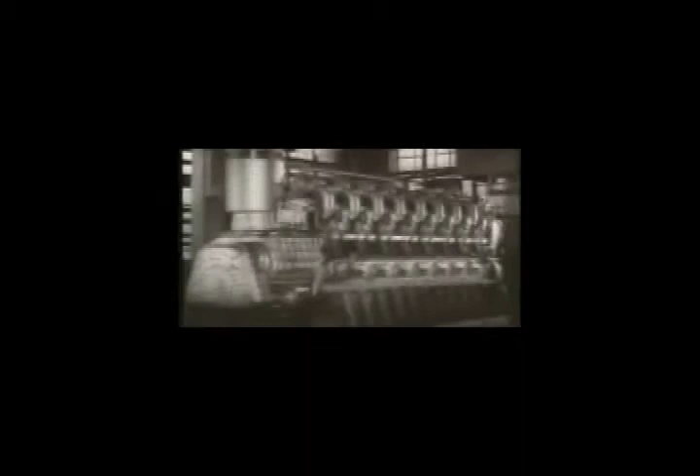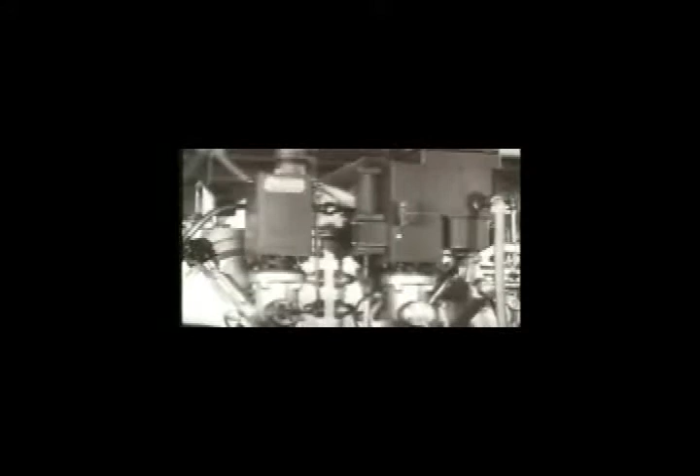If a diesel engine is to be operated within a certain speed range and under varying loads, a mechanical device is required to control the amount of fuel injected. This device is called a governor.

The speed of a diesel engine depends on two factors: the amount of fuel injected into the cylinders and the load under which the engine works.

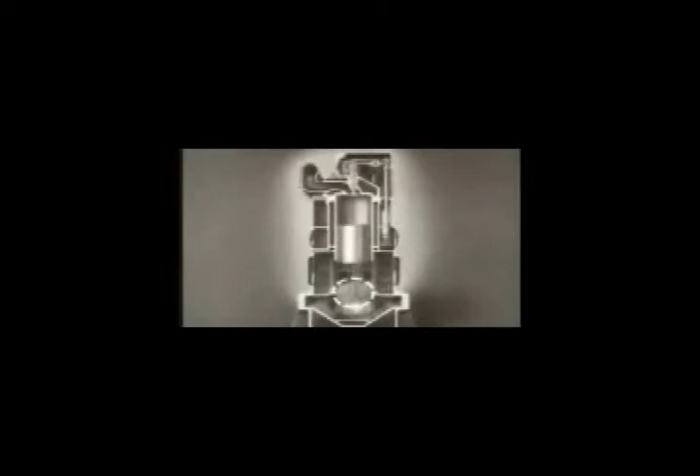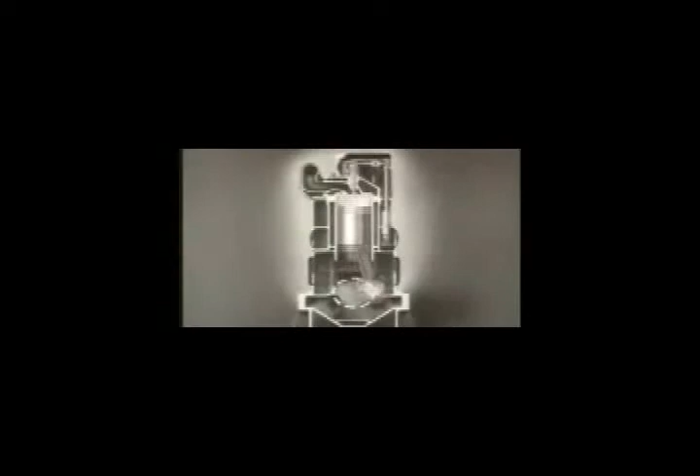Suppose the engine is running at a certain speed. If the load is increased, the engine slows down. If the load should decrease with no change in the amount of fuel injected, the engine speeds up. By regulating the amount of fuel injected, the engine speed may be kept within a certain range. To do this, various types of governors have been developed.

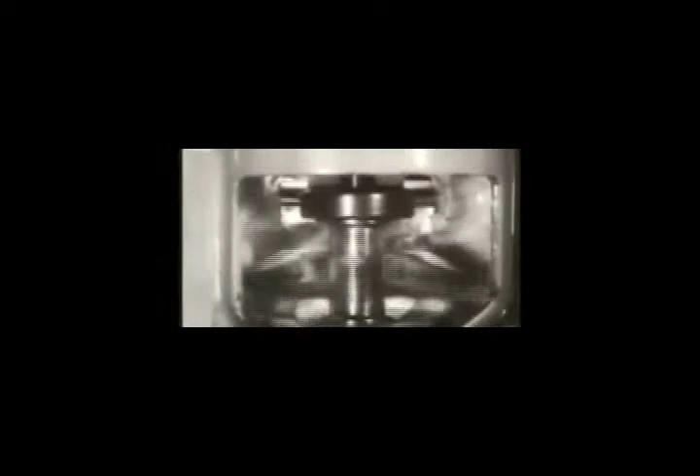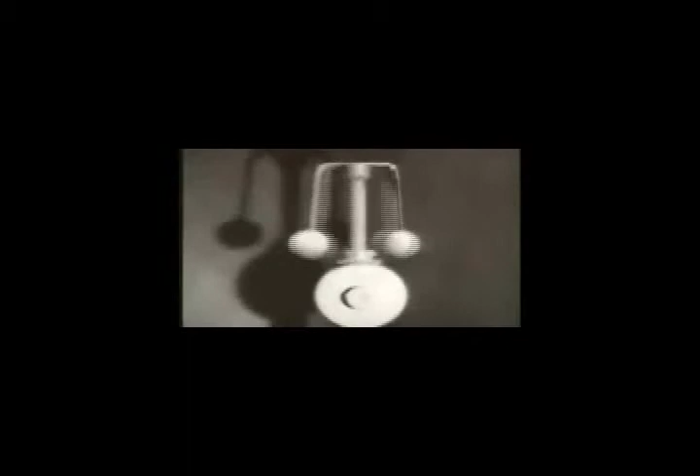Most governors operate on the principle of centrifugal force. Centrifugal force is the tendency of an object, when traveling in a circular path, to move away from its axis of rotation. These rotating weights are affected by this force. As the speed is increased, centrifugal force grows stronger, pushing the weights further away from their rotational axis. The distance from this axis is proportional to the speed of rotation.

The regulating governor not only keeps the engine from overspeeding, but maintains the engine's speed at a fixed rate despite changes in load.

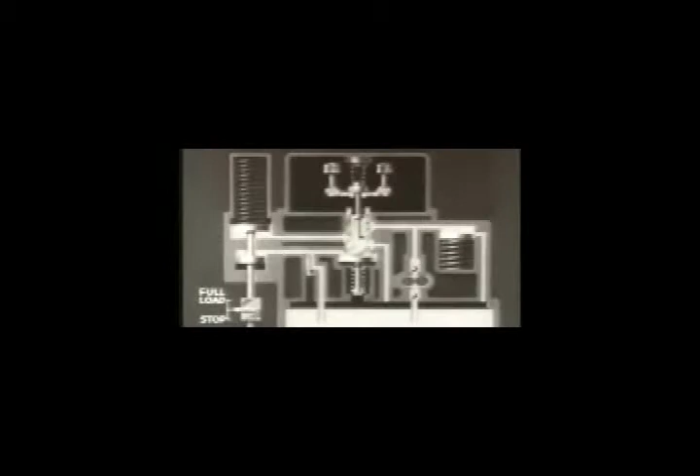In this governor, the flyweights are linked hydraulically to the fuel control assembly. This assembly consists basically of a piston connected to the fuel system controls, a housing, and a spring. The downward pressure of the spring is balanced by oil pressure on the lower side of the piston. The amount of oil in this space is regulated by a valve called the pilot valve, controlled by the flyweights.

When the engine is running at a set speed, the port to the power cylinder is covered by the pilot valve plunger. The plunger is held in this position by the flyweights.

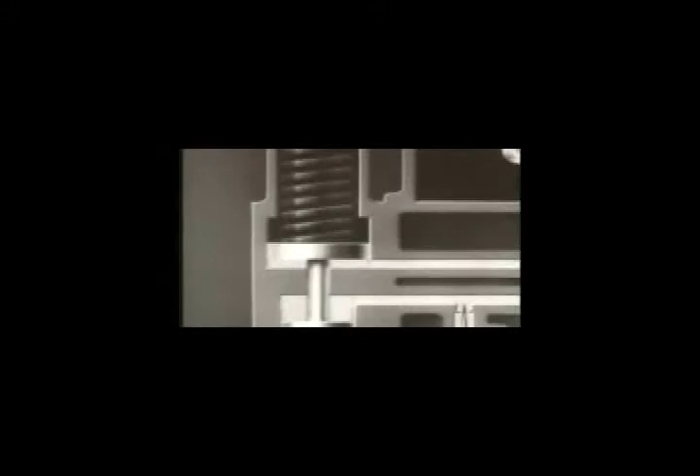If the engine load decreases, the engine speeds up, and the additional centrifugal force throws the flyweights outward, raising the pilot valve plunger. This opens the port, and oil from the power cylinder is now allowed to flow through the pilot valve cylinder into a drainage passage to the oil sump. The power spring forces the piston down, actuating the linkage to the fuel system controls, and the supply of fuel to the engine cylinders is diminished.

As the engine speed returns to the set rate, the flyweights resume their original position, and the pilot valve plunger again covers the port.

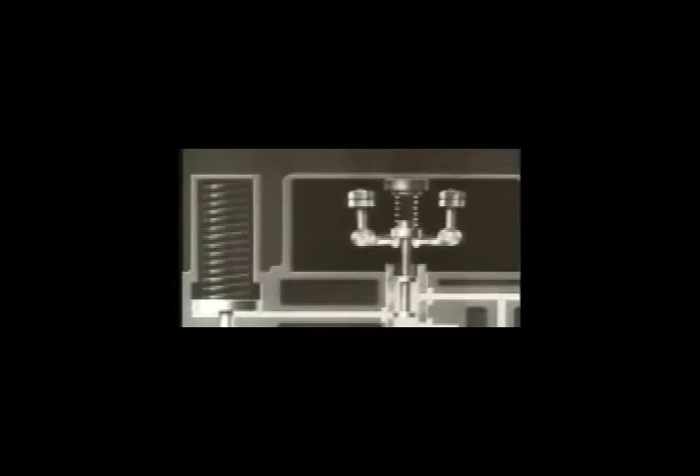If the load increases, the engine slows down, and the flyweights move inward. This lowers the pilot valve plunger, allowing oil to flow through the pilot valve chamber to the power cylinder. This oil, supplied by a pump, is under a pressure sufficiently high to overcome the pressure of the power spring. The power piston moves upward, increasing the amount of fuel injected into the cylinders. Once again, as the speed returns to the set rate, the flyweights resume their central position.

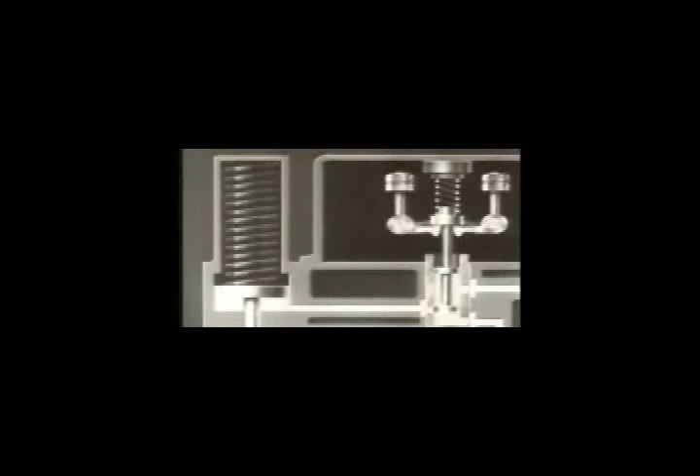The gear pump, which supplies the high-pressure oil, is driven from the governor drive shaft and takes suction from the governor oil sump. A spring-loaded accumulator maintains a constant head of oil and allows excess oil to return to the sump.

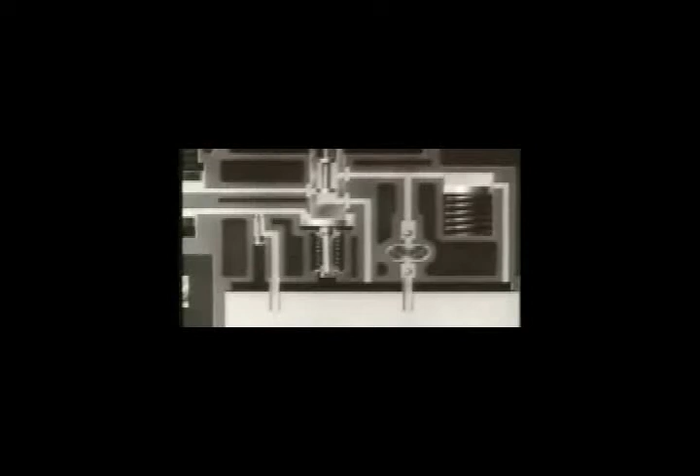To increase the regulating governor's sensitivity and to prevent overcorrection, a compensating mechanism is used. This allows the pilot valve port to remain open just long enough for the engine speed to return to the set rate. A compensating plunger on the power piston shaft moves in a cylinder which is also filled with oil.

When the engine speed increases and the power piston moves downward, the compensating plunger is also carried down, drawing oil from a cylinder below the pilot valve bushing. This creates a suction above the receiving compensating plunger, which is part of the bushing. The bushing moves upward, closing the port to the power piston. Thus, the power piston is stopped, allowing no time for overcorrection.

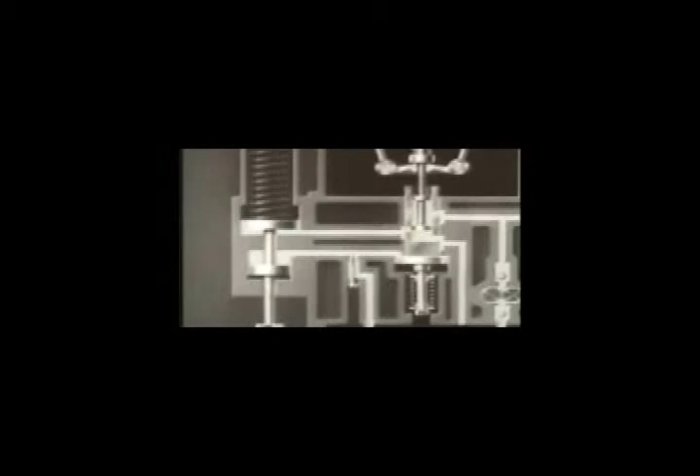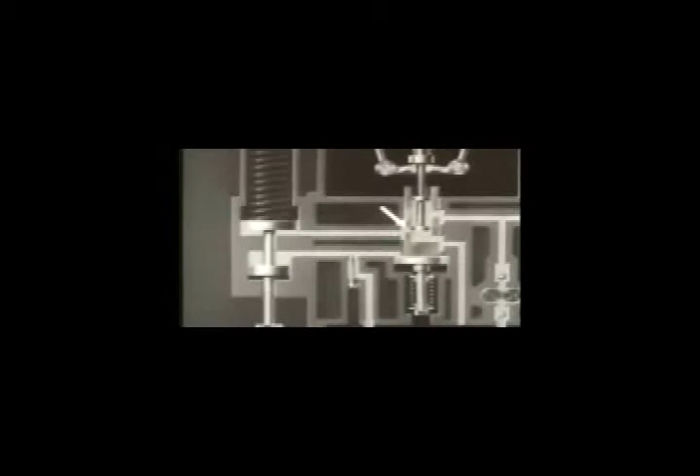As the flyweights and pilot valve return to their central position, oil flowing through a needle valve allows the compensating spring to return the pilot valve bushing to its central position. To keep the port closed, the bushing and plunger must descend at exactly the same speed. Therefore, the needle valve must be adjusted so that the oil passes through at the required rate for the particular engine.

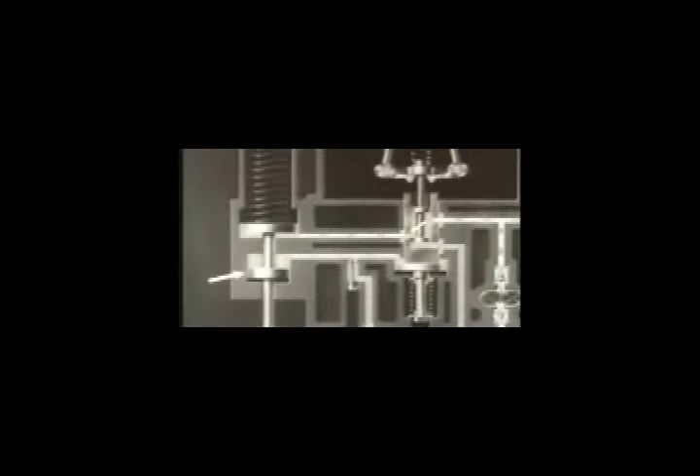When the engine speed drops below the set rate, the actuating compensating plunger moves upward with the power piston. This increases the oil pressure above the receiving compensating plunger, which therefore moves down, carrying with it the pilot valve bushing. As before, the port leading to the power cylinder is closed. The excess oil in the compensating system now drains out through the needle valve as the spring returns the bushing to its central position.

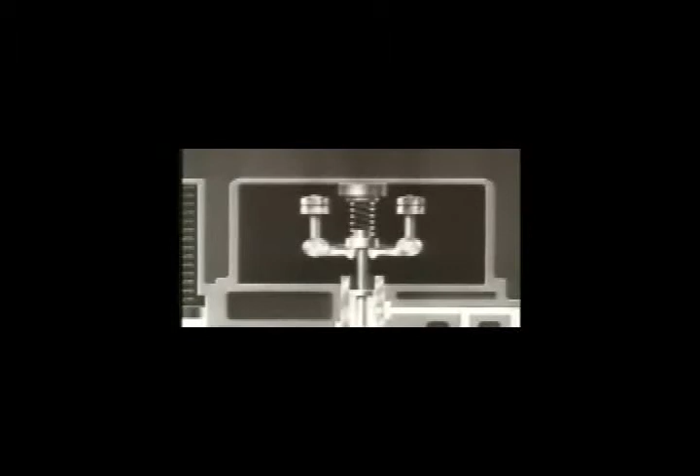The governed speed of the engine is set by changing the tension of the speed adjusting spring. The pressure of this spring determines the engine speed necessary for the flyweights to maintain their central position. Oil, allowed to leak past the various plungers for lubrication purposes, is drained into the governor oil sump.

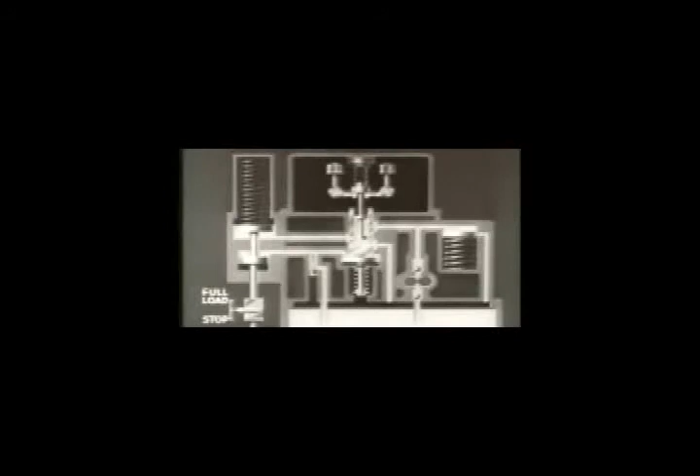These are the basic elements of this type of regulating governor. In actual operation, the events which we have seen step by step take place almost simultaneously. Let us review the operation of the governor in maintaining the engine speed under a suddenly increased load.

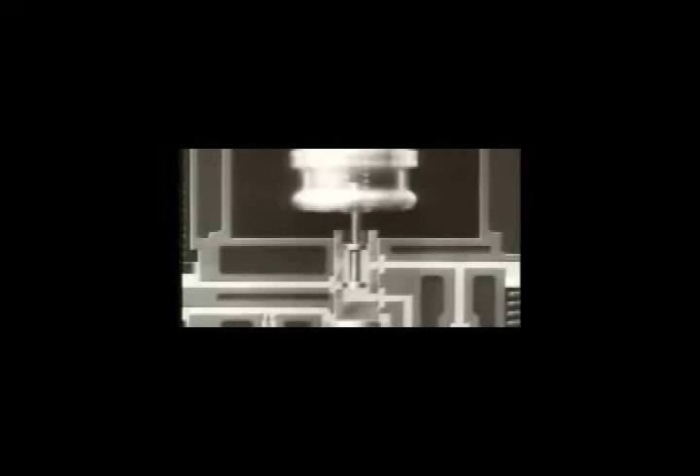The engine speed drops and the flyweights move inward, lowering the pilot valve plunger. Oil from the gear pump and the accumulator forces the power piston upward, increasing the amount of fuel injected into the engine cylinders. In the meantime, the pilot valve bushing has moved downward, closing the port in the pilot valve. As the engine speed returns to normal, the flyweights and the pilot valve plunger and bushing return to their central position.

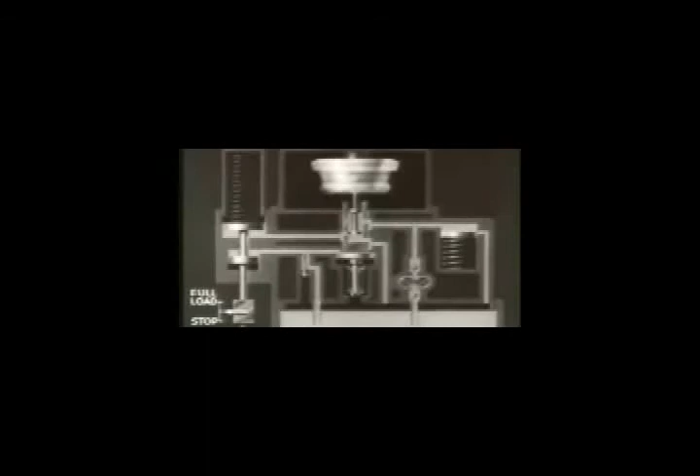Now, if the load suddenly decreases and the engine starts to race, the flyweights move outward, lifting the pilot valve plunger. Oil drains from the power cylinder, allowing the power piston to move the fuel control, decreasing the amount of fuel injected. In the meantime, the pilot valve bushing has moved upward, closing the port in the pilot valve. As the engine speed returns to normal, the flyweights and the plunger and bushing again resume their central position.

Always keep the governor clean and keep it free from dirty lubricating oil. Flush it out every two weeks with clean fuel oil. Flush it out every six months with carbon tetrachloride.

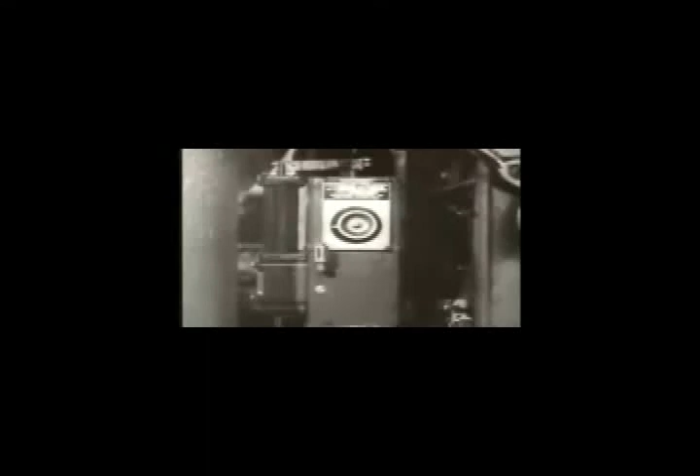Refill it with lubricating oil of the viscosity specified by the operator's manual. Be sure that the oil is always at the proper level, keeping it above five-eighths of an inch in the gauge glass.

Never tamper with the governor unless you are positive that there is some trouble with it. And even then, all repairs should be made only by an experienced operator.